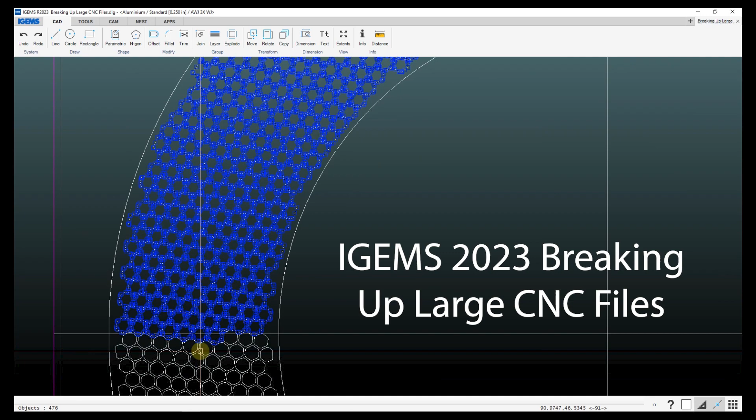So if we just go ahead and make a CNC file for what we've got, just to see how large the file is, it'll take a minute or so.

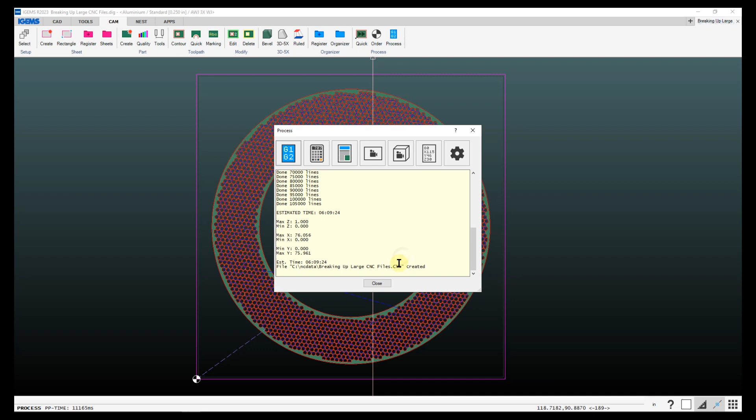Alright, let's take a look in File Explorer, see how big that is. So we got almost 3.4 megabytes.

So let's go ahead and break this up. First of all, we're just going to select all and hit X to explode.

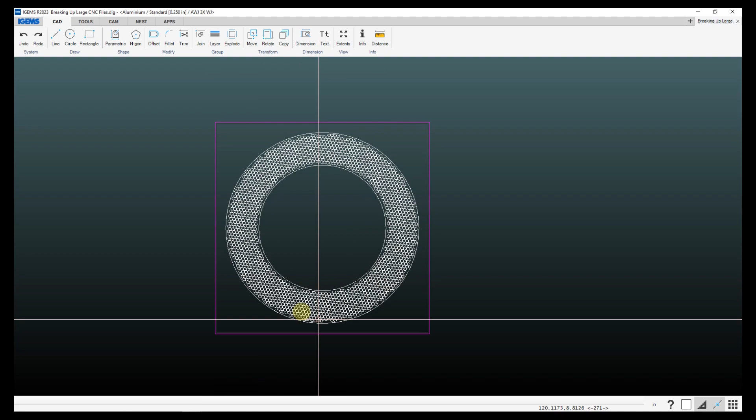What we're going to do here is make different colors so we can use those colors to select the geometries we want for 3 or 4 different files that we're going to make. To make selecting a little bit easier, I'm just going to draw a line from midpoint to midpoint, and another line from midpoint to midpoint.

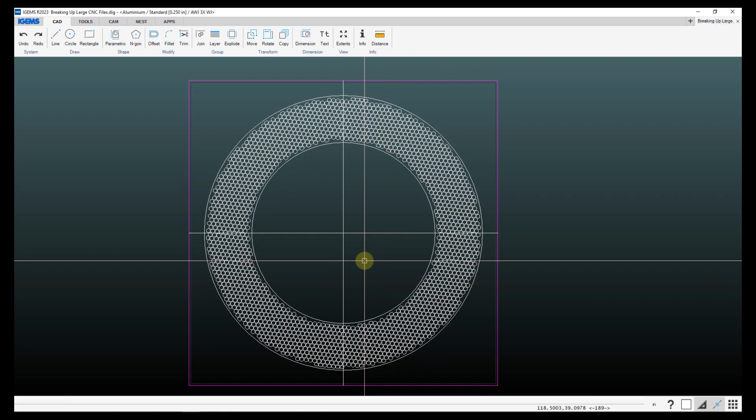Then I'm going to drag a box and go slightly beyond here to see what I end up grabbing. So we've got all these selected. Then we'll come down to the lower right hand corner, click on the color button, and choose a random color. We'll go with yellow.

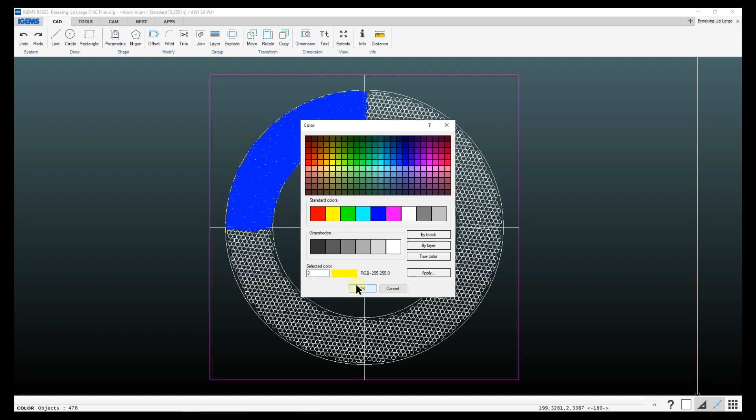Then we'll do something similar for these other ones. If I grab these ones, something like that, we'll go with green for that.

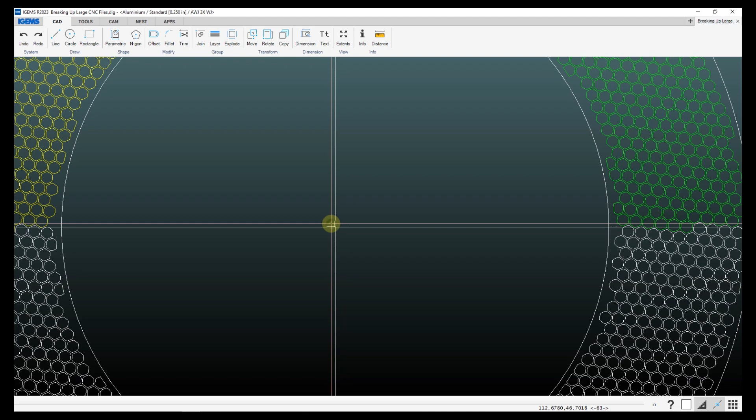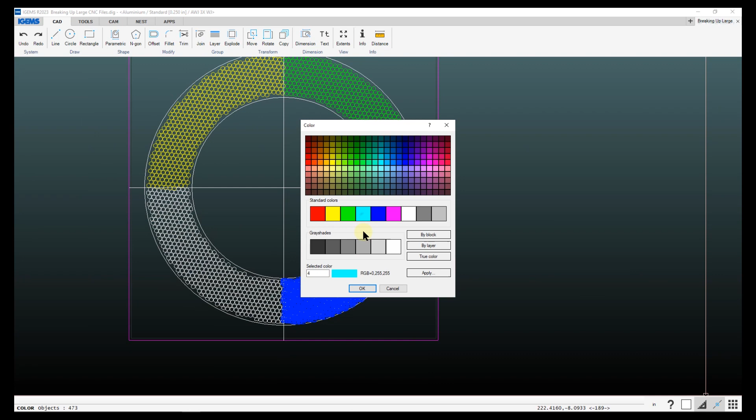For this next one, I'm intentionally going to try to miss a couple of these, or deselect them, just to show later in the process how we'll end up getting those anyways. So if I end up not selecting, say, those 3, as well as that one there, 4, we'll make these ones light blue. Then we're going to leave the other ones as white, so that way we'll be able to capture these ones over here, any other ones that we might have missed.

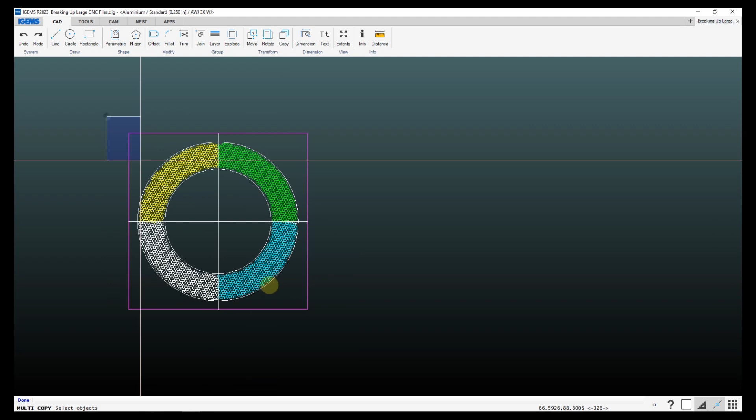Now what I'll do is make 3 additional copies of this. So we can do our copy command, or Shift C, select all that, hit enter, base point, left click, and randomly put 3 more on here.

Alright, now we can start creating some parts here. So we'll go to our Cam tab and create, prompting me to select objects. We're going to start by selecting the ID and the OD on each of these so that IGEMS will know what's inside cuts versus outside cuts.

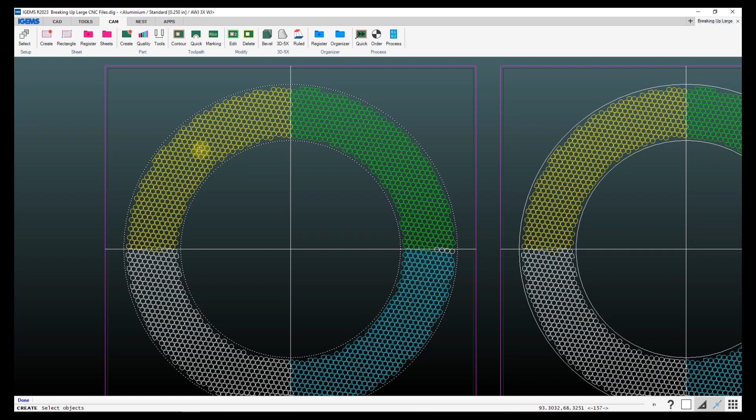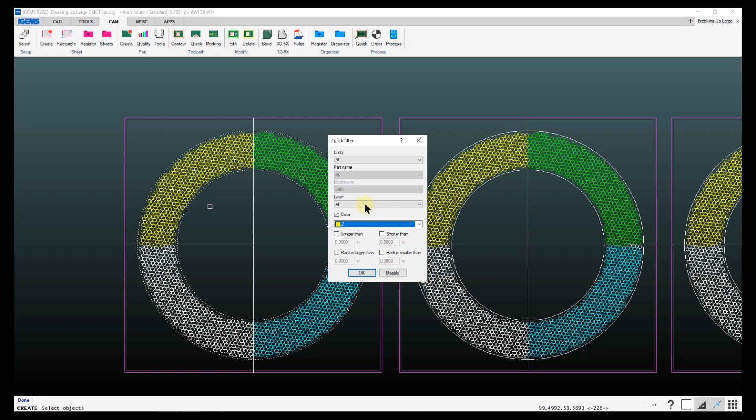To get those yellow geometries, we're going to right click and choose Quick Filter. With Quick Filter, you can easily select entities based on different properties like entity type, layer, or color, which is what we're going to do here. So we got the color box checked and it shows us the different colors in our drawing. We're going to choose the yellow color, click OK, then drag a box around all this and hit enter. It gives a preview of what it's got. Click OK.

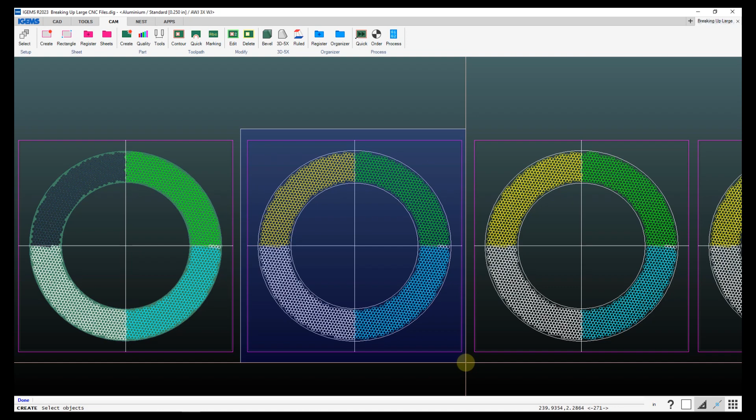Then we'll do a similar thing for the green color. Go back to create, right click, quick filter, and choose green instead. OK, drag a box around this. Now in this case, I forgot to select the ID and the OD, and right now since the quick filter is on, I can't select that because it's white and it's looking for green things. So if you ever get in this situation, you can disable the quick filter, right click again, go to quick filter, and click disable, and now you can freely select anything else.

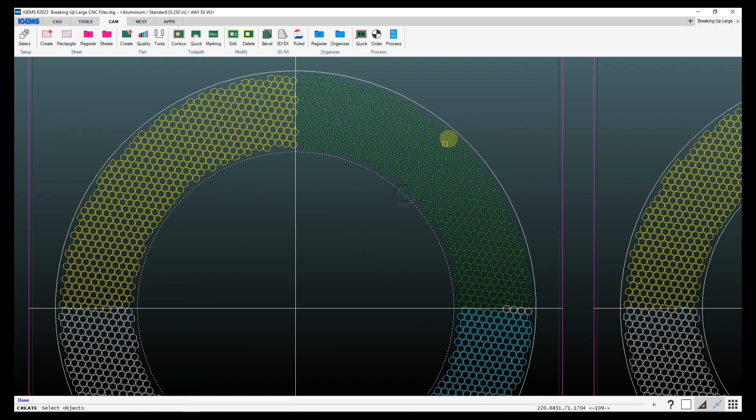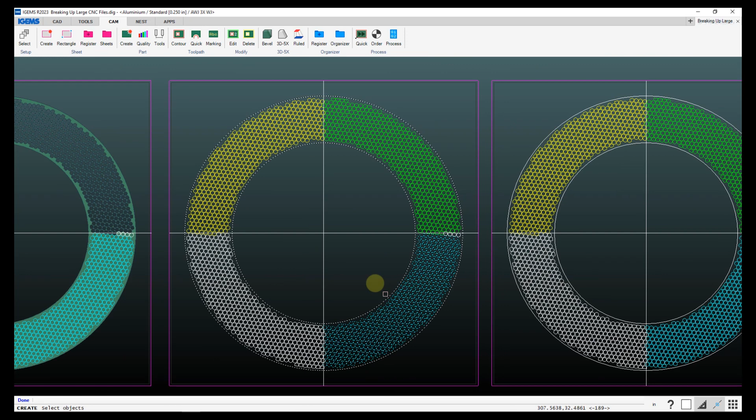Hit enter, okay. Same thing for the blue: create. This time I will choose the ID and the OD first, then right click, quick filter, choose the blue. Drag a box around it. Now you'll note we did not select these because they're white, but in the last step here we'll end up getting those. Hit enter, okay.

And then again, create, choose ID and OD, right click, quick filter, choose the white color. Drag a box around everything, and as you see, it now selected those. Okay.

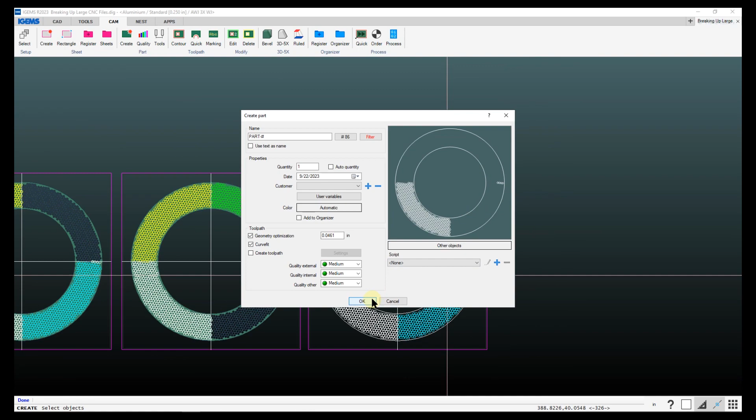If you preferred, you could go back and change those to either the blue or the green and get those to stay together. But for our purposes, we'll just go with what we got here.

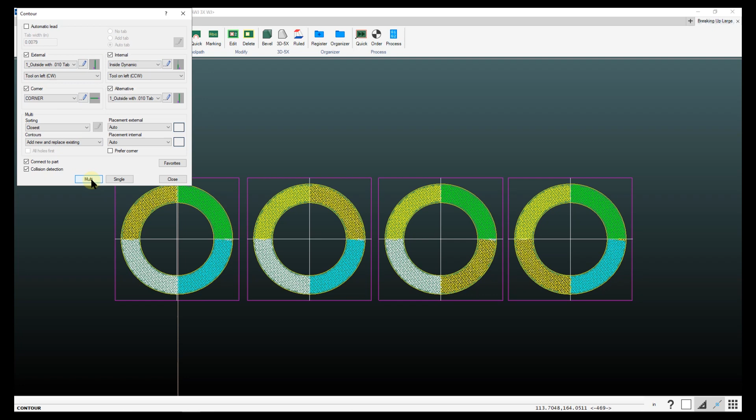So now we've got that. Now we can go ahead and add toolpaths. Contour button, and we've got our different settings here. We're just going to do multi and select everything. Hit enter.

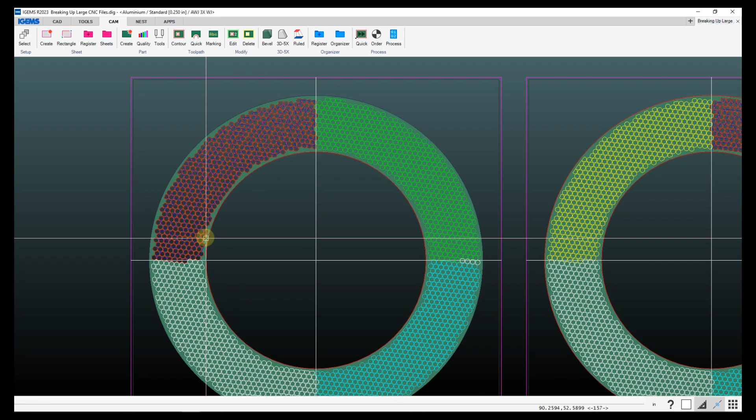On this first part, we're going to delete the outside cut because we're not going to want to do that until the end. We can leave the ID, so it'll cut the ID and then cut all those. On this one, we will delete the ID and the OD. We'll also delete ID and OD on this one. And on this one, we'll just delete the ID, leaving the OD since that'll be the final cut. Hit enter.

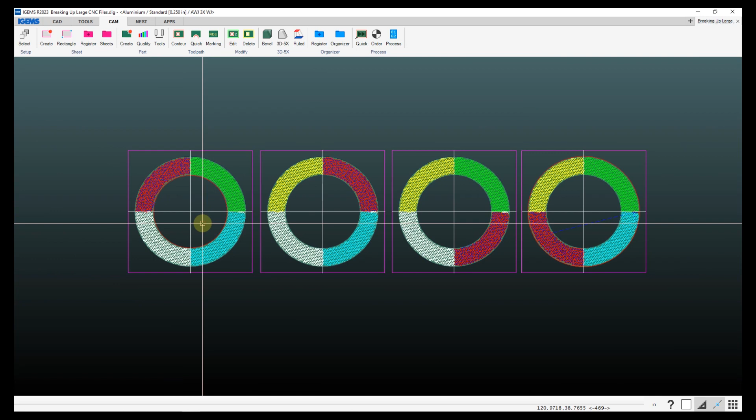Got that, and now we can go ahead and set our zero points. So it's very important when you are at the machine cutting this that before you start the program you save your start point, so in case anything ever happens you can get back to where you started these programs from.

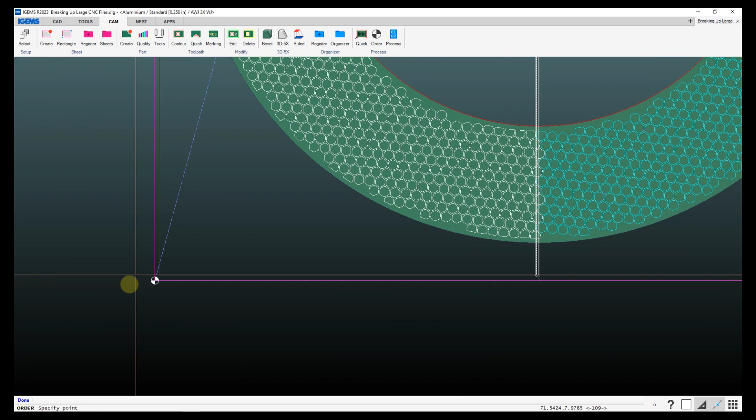So we'll set our zero points, do the order button, drag a box around everything, which puts our zero points on the corners of those sheets. Now to make it a little bit easier to make sure that you are going back to your same start point, there is an option under the order button - if I select that one, hit enter, do an end rapid here, and tell it to indicate at the end of the program to come back to that corner of the sheet there, then hit enter.

There is also a setting under the process area where you can tell it to return to park position if you prefer doing it that way. I'll show you that here in a moment.

So we'll do order button and end rapids, and then make sure you click right on the corner of that sheet. Close, modify this one, end rapids, and that. We'll leave the last one without that.

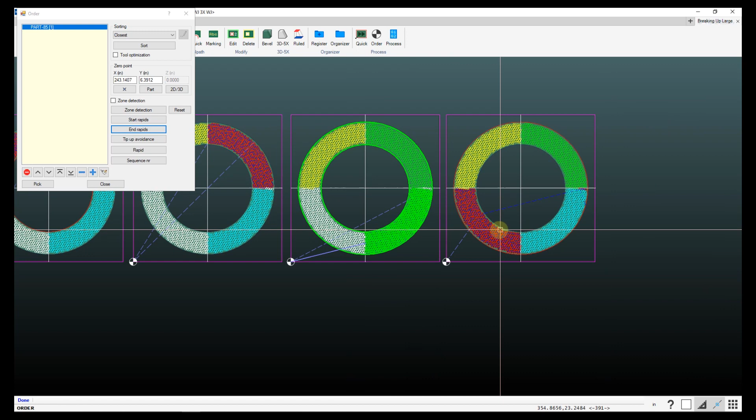Show you the park position thing. So now we've got that. Now we can go ahead and process and see how large these files are now.

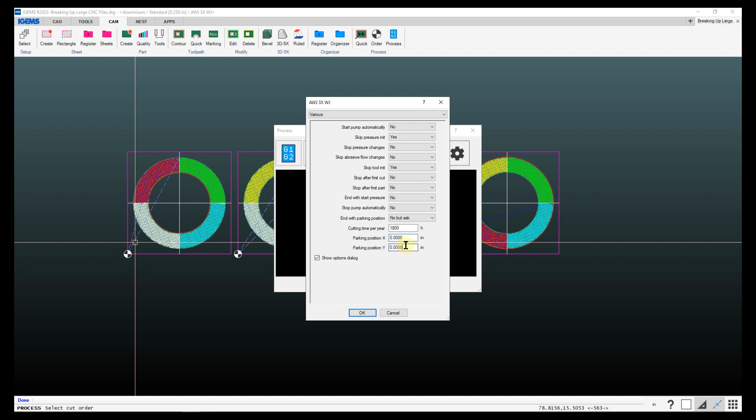For the park position, which we don't need on this one, but just in case you didn't actually click right on the corner of the sheet, under the settings, under the various menu, you've got end with parking position. You can set this to one of these four options here, and then at the end it's going to go back to your X0, Y0 position where you started the program. So two different ways of achieving that same goal there.

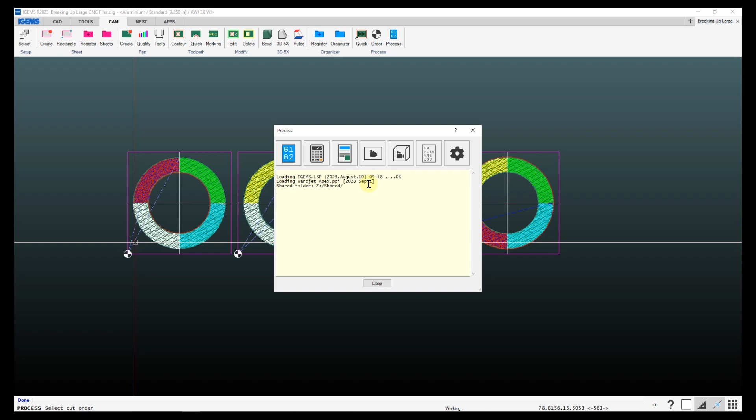So if we post this out, you've got the option there. If you want to make doubly sure that you go back to your start point, you can check that box. On this one it won't make much difference, but it's an extra level of protection. So let's see, part 1.

Okay, so now let's go see how large that file is. So now it's 847 KB instead, so that should be easily digestible by the controller.

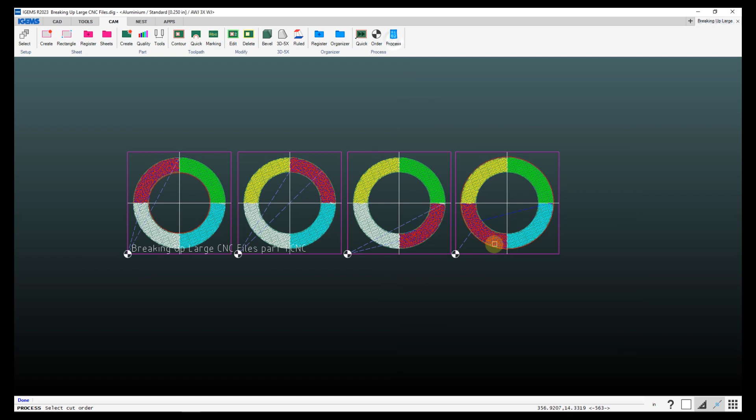So if we look at, say, this one here where we didn't do the end rapid, I'll just do the preview, don't have to necessarily make it. So check end with park position.

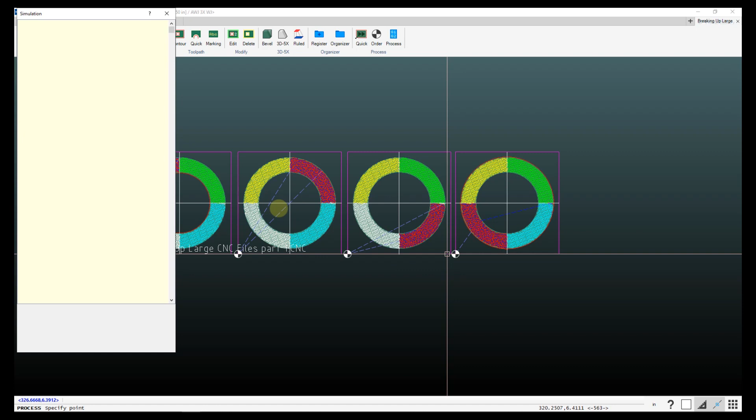Scroll down to the end after it finishes the cut. Then it's going to G00 X0 Y0, goes to its parking position, which since at the beginning of the program we had G92 X0 Y0, is going to go back to where we started that program, so that's another way to get back there.

So that is how you can break up large files. If you have any questions on that, let me know.